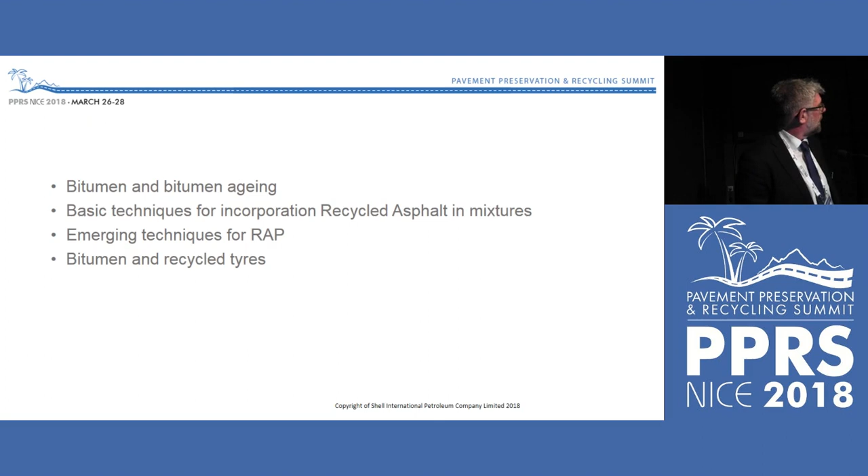Okay. So bitumen is quite a complicated material. It's obviously produced during the refining of crude oil. There are hundreds of thousands of different compounds that make up the chemistry of bitumen, and this means it's quite difficult to describe bitumen chemically. And so typically people will use a rheological term to describe bitumen, so penetration test or softening point, or increasingly we will use more fundamental nomenclature like G*, or more fundamental rheological properties. So we don't tend to describe bitumen in a chemical way. Even aging, we describe as a change from one type of rheology to another.

The bottom line is, as the bitumen ages, it becomes progressively more viscous in the pavement. And as it ages, there are certain species within the bitumen, as I'm going to show on the next slide, which actually increase in polarity, so they pick up more polar compounds through aging. And so the challenge when it comes to RAP, if we look at it chemically, is how do we put this aged material, which has naturally got older and has more insolubles over time, back into the next surfacing?

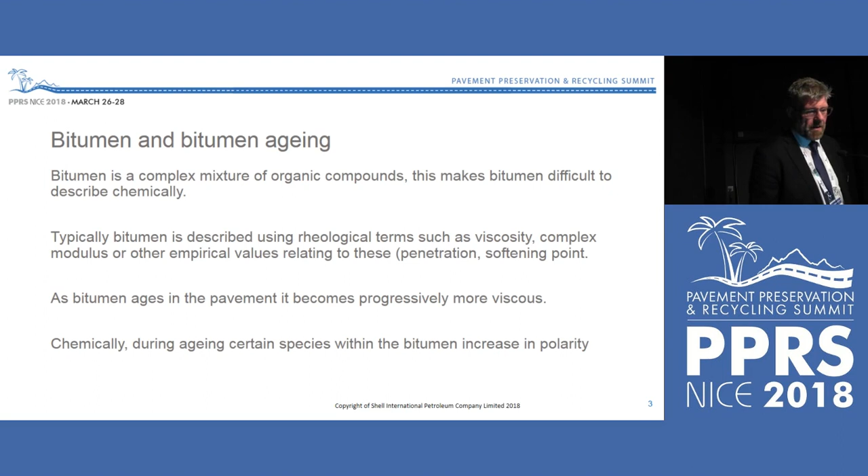So this slide is from some of our recent research, and it throws up quite a few questions. The first thing that should be quite striking here is that, sorry, for those that are not perhaps so au fait with bitumen chemistry, at the first cut, bitumen chemistry tends to be described by solubility. And so the insoluble part of the bitumen we would refer to as an asphaltene, and the soluble part of the bitumen we would describe as a maltene.

So asphaltenes, the insoluble part, they don't melt. They're kind of pseudo-solids, I would describe them. And what you can see as bitumen ages, and there are some very long-term laboratory aging tests, is that the oxygen, if we look at the oxygen, ends up in the asphaltene. So there's a kind of a partitioning effect here.

And so what we end up with are two things. We end up with more insolubles in the bitumen, and we end up with, generally speaking, larger insolubles. And you can see the level that's reached here. It's 18 days. So we've actually used a standard piece of testing equipment here for 18 days in a PAV. So anyone who's tested bitumen can imagine what the 18-day-old PAV-aged bitumen looks like. It's very, very hard. We can manage to squeeze about 2% of oxygen into that asphaltene fraction.

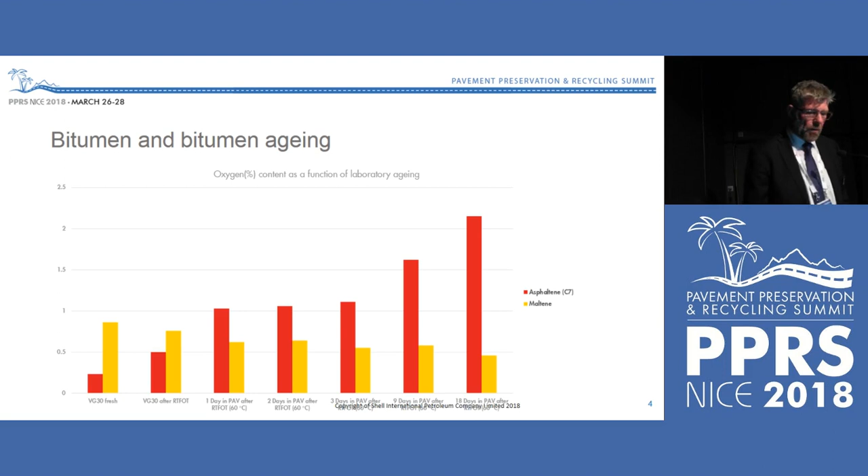And so basically what we've got is a hydrocarbon-based material picking up oxygen and other elements as it ages in its life. It's getting progressively more viscous. Rather unsurprisingly, the number one tactic here is to put something of a lower viscosity with the bitumen. And we've seen over the last years a growth in the demand for softer grades of bitumen as the RAP contents and recycling have increased.

If you increase your quantity of binder coming from the RAP, then not surprisingly you need to add a binder which is significantly softer in order to restore that back to the penetration or the target viscosity of the mixture, which is fine. The current trends in refining, or I could even remove the words current and trends, but refining tends to not like to leave things soft in the residues. It tends to work in the other direction, and so refining is driven by not having too much soft stuff left in the bottom.

And one thing here is that restoring rheology doesn't restore chemistry, so it doesn't restore aging. You mix some soft component with some hard bitumen, you will restore the rheology, and this is harking back to my opening remarks about the need for good mixture design, particularly when it comes to aging, and what happens after the blend has been aged in the asphalt mixture itself. So these more polar asphaltenes, they're still there. They might have been diluted, there may be less of them because you've added something else, but you're not fundamentally restoring or able to reverse the chemistry.

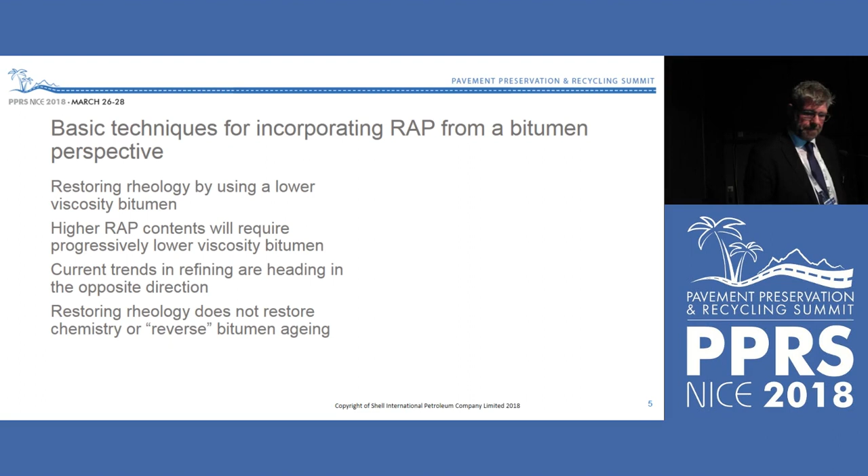One curious thing that we've seen from our own work, and to be very accurate, this is true of some of the blends that are not RAP related. However, our observation is that when you blend bitumen and RAP together, it doesn't perfectly follow the blending rule of normal bitumen. Now, this is in the binder itself, not in an asphalt mixture. But we're able to observe two things. One is a deviation from the normal log blending rule.

The second thing that we've observed from our own research is a small but measurable steric hardening when you mix the more polar aged binder with the fresh binder. Again, to balance that, even when you mix two bitumens together, there is a small amount of measurable steric hardening, just because it's a blend of two things and it takes a little bit of time to sort itself out. Just to give a magnitude, we're only really talking about maybe a 5% increase in stiffness over time. So this is not a big effect, and I'm not sure this can even be measured in an asphalt mixture, but under laboratory controlled conditions, you can measure a small amount of hardening when you mix the two.

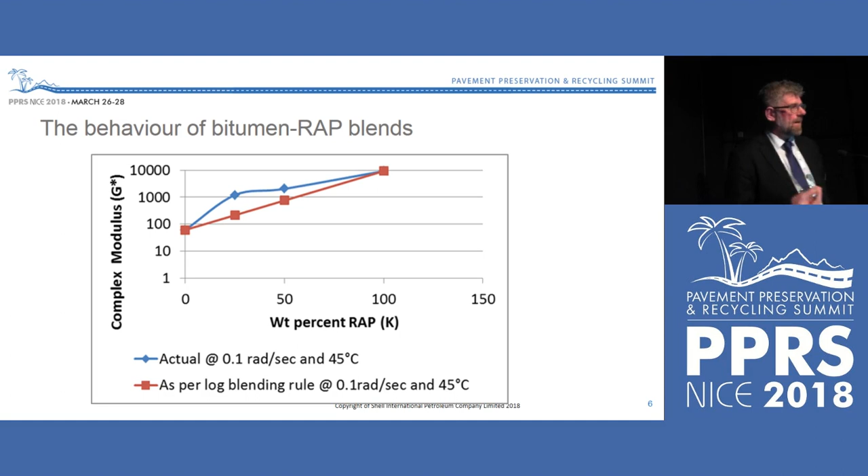Now that may lead you to the conclusion that the blend that should be used should be slightly softer than the one that we have in our minds today to take account for this.

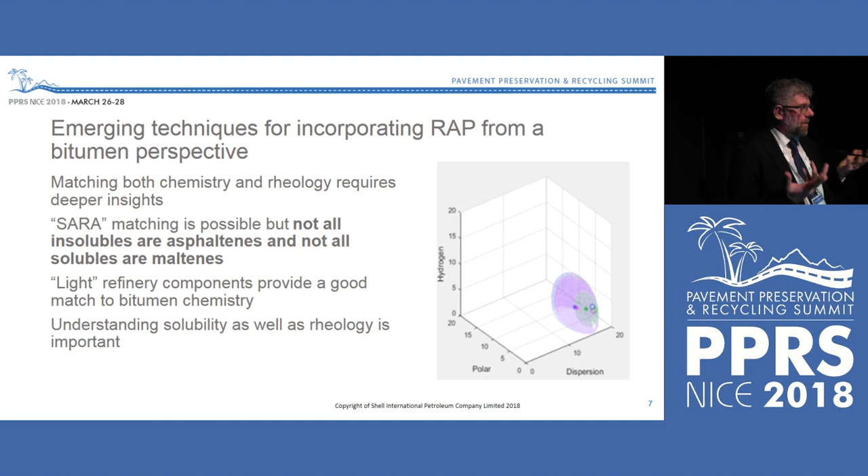And so these spheres allow you, if you measure solubility parameters of different materials, to map out an overlap to show how miscible or how closely in terms of solubility parameters those two materials sit together. The powerful part of that is as you age these two, you will see the spheres start to move apart. So as you age the soft component with the bitumen, or the softer bitumen, whatever you've used to generate these spheres, you can actually see what happens over time as the solubility parameters between the two materials change.

And we've seen with our former colleagues in Japan, in Showa, there is some SARA matching, I would describe this. SARA is saturates, aromatics, resins and asphaltenes. There are some people attempting SARA matching, so they will say, I will measure the chemical solubility of your binder, and then I will take refinery streams and blend you a bitumen so that the net effect of that rheological reconstitution of the binder is you end up with something with a SARA analysis similar to bitumen. Of course, the key is to have something relatively low in asphaltenes and soft so that you can rejuvenate the binder.

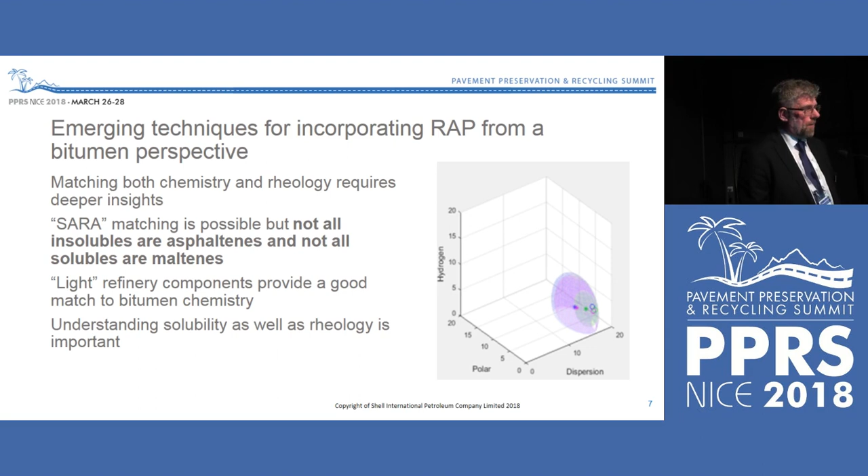One thing I would say here is that not all insolubles are asphaltenes, and conversely, not all solubles are maltenes. And so you will often see maltene restoration. As an extreme example, vegetable oil is not a maltene fraction. When you add it to the bitumen and make a SARA analysis, it will come out in the part of the binder that is soluble, but that doesn't mean that it's a maltene by definition. And you could extend that to anything soluble; it could claim to be a maltene. For me, a maltene is the soluble fraction from the refinery bitumen. Okay.

RAP and warm mix asphalt bring some extra complexities. Obviously, to reintroduce the RAP into the mixture, a lot of plants still rely on superheating of aggregate. Of course, if you've got a parallel drum or a more sophisticated plant, adding RAP in high quantities doesn't need you to elevate temperatures. So there is a conflict or a potential issue to overcome when using high quantities of RAP and warm mix technologies together. There are a number of ways in which that can be achieved.

From a bitumen perspective, there are additives that can be put into the bitumen to lower the viscosity or make the RAP easier to work. I think it's fair to say that a lot of warm mix technologies are used, in fact, to increase RAP rather than to lower temperatures. That's a general observation, but they're used more as compaction aids. Luckily, they have the brand and the tag of warm mix additive. However, they are useful for increasing workability when using higher quantities of RAP.

You can have special manufacturing techniques. I was fortunate enough to speak at the PPRS in Paris, where I talked a little bit more about this. You can buy a kind of maltene fraction or a special flux that you can mix with the RAP, and so at very high quantities reintroduce the fresh binder as a foamed component to make a warm mix. And by warm I mean compactable at maybe 120 degrees. You can make a high RAP warm mix by a combination of foam bitumen and fluxes.

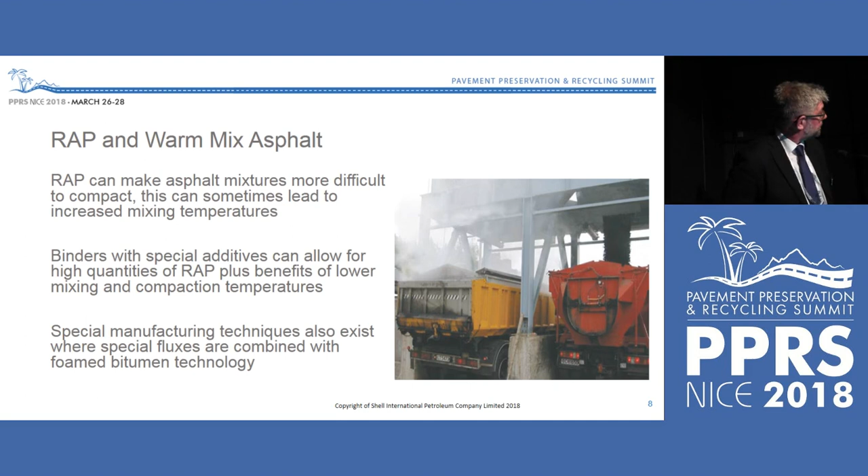Finally, on the RAP side, on the recycling of asphalt side, there is going to be quite a lot of RAP turning up with polymer in it. Now, that isn't a new story. We're not generally, as an industry, that good at segregating RAP.

And what we're going to find is that the surfaces at the end of their life are going to contain, you know, a fair proportion of a very high quality, expensive component, which may have a use in the subsequent layers of the road. And so we will see more and more, as polymer modification of surface layers becomes more commonplace, more and more RAP being generated that has polymer in it.

At the moment, I would say that largely gets diluted and is lost into the layers of the road in which the RAP is used. We don't really try to take a benefit from the polymer that's already there. I know there are pockets of good practice and good examples there, but as a general rule, RAP tends to be treated as a kind of standardized sort of material.

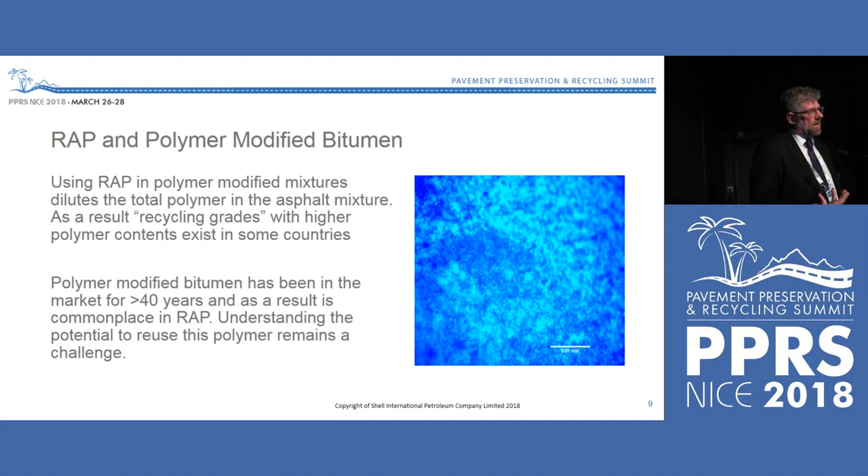And we tend to look at the penetration of the bitumen and see how much can go back into the... And so understanding the potential to reuse the polymer in RAP, I think, is going to be a challenge for the future.

It's okay if you're in an on-site mixing where you're just blending in the rubber and then using it before it has a chance to settle, but largely speaking, the crumb rubber will settle from the bitumen. And so from a binder technology point of view, it's important to use some sort of compatibilizers which allow the crumb rubber to stay in solution more freely, more readily than it does if you just blend simple rubber and bitumen, maybe some oil to soften the mixture.

The second part of the bitumen technology story for crumb rubber is allowing the use of viscosity modifiers to reduce the temperatures for laying and compaction. Crumb rubber makes the binder incredibly viscous. This will sometimes mean that people elevate temperatures. With the temperatures comes energy use, but also increased emissions, and it also makes the material slightly more likely to separate at high temperatures actually.

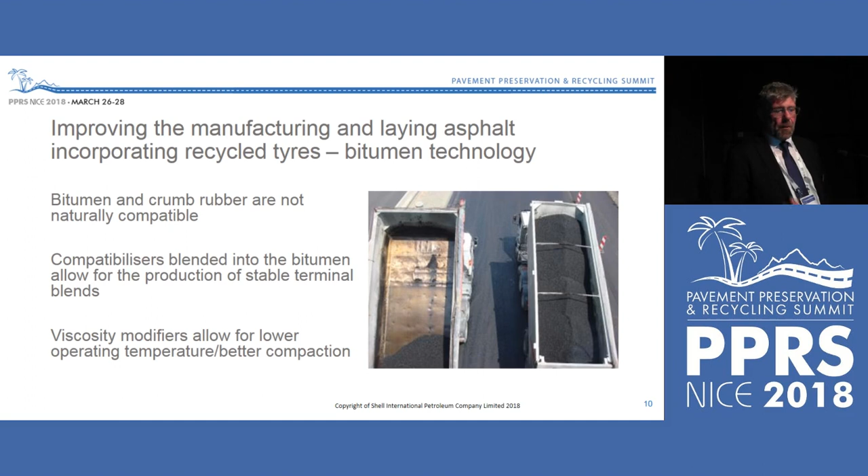Anyone, again, who's been at a paver using recycled tyres in bitumen will know what that experience is like. And so we have found a way to additivate the bitumen, which actually will mean that a lot more of the emissions from the rubber and the odour from the rubber remain locked inside of the bitumen.

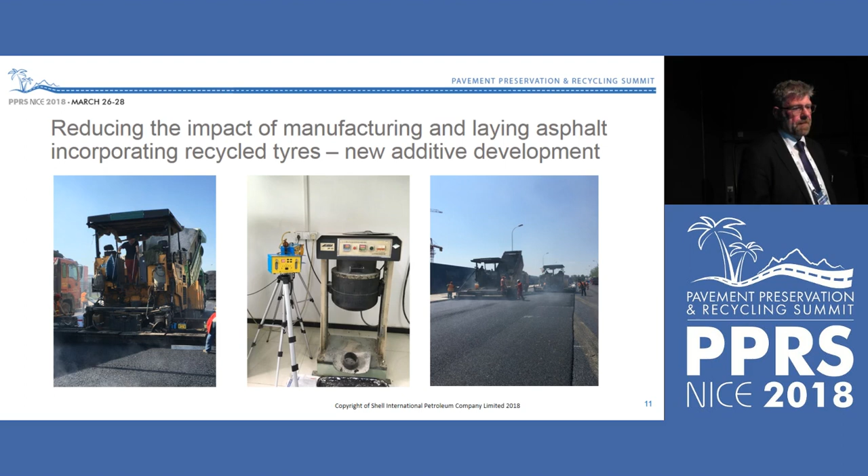So just to summarise, RAP's an essential part of the asphalt story, genuinely recyclable, reusable in asphalt mixtures. Understanding the fundamentals of bitumen in RAP is really crucial. If we're going to maximise the use of RAP and the benefits from RAP, we need to understand what happens when bitumen ages and what happens to that material in the subsequent cycles.

And there are a lot of bitumen technologies that have a role to play in increasing the use of RAP, and they include lower temperature binders with viscosity modifiers, soft bitumens, special bitumen-like fluxes. And again, when using ground tyres and crumb rubber in asphalt, bitumen with special additives to improve the compatibility and improve the workability, and more recently improve the emissions and odour characteristics of such mixes, have been developed.